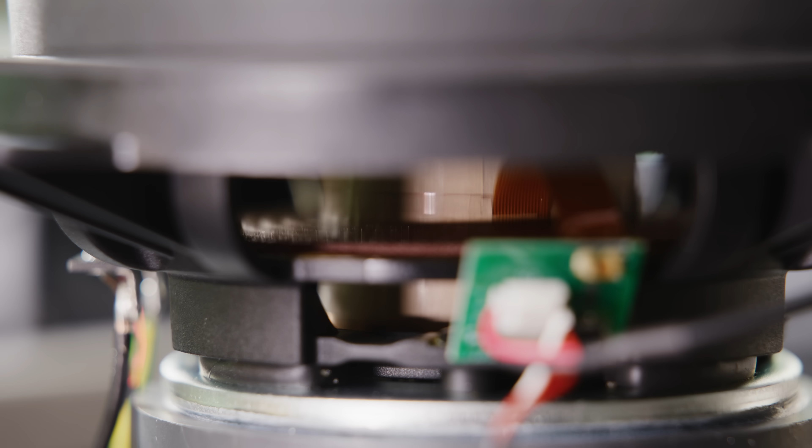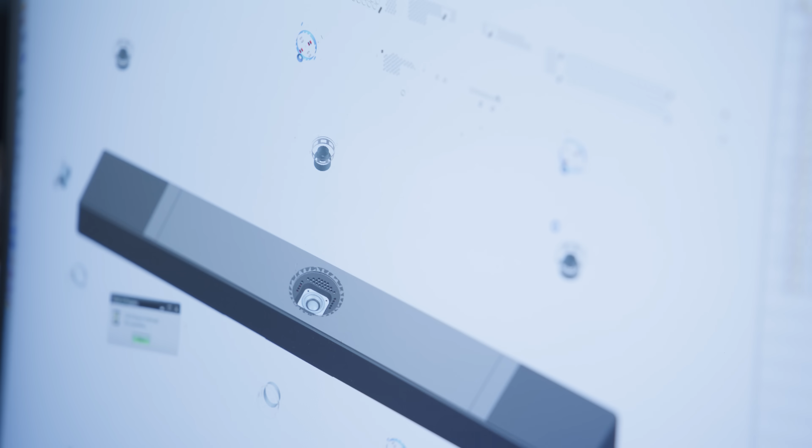We've developed a sensor called VECO, which goes inside a driver, and we can detect the coil velocity. And effectively, this is an electrodynamic sensor. Intuitively, it's very straightforward. So we know the signal that we're applying to the loudspeaker. We know the electromechanical properties of the loudspeaker. So in an ideal world, we should be able to fully predict the velocity of the driver based on that information alone. Of course, in the real world, that is not what happens.

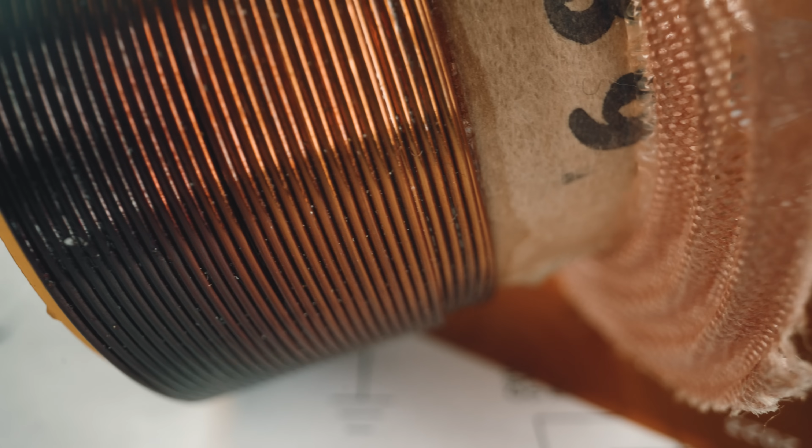Every loudspeaker is subject to some amount of distortion, which will mean that the velocity that the driver is actually exhibiting will be different to what we predict. That's where the VECO sensing coil comes in. It's inside the driver, it's underneath the primary coil, so it's moving as much and as quickly as the primary coil itself. So we have a way of sensing in real time how the driver's velocity is performing.

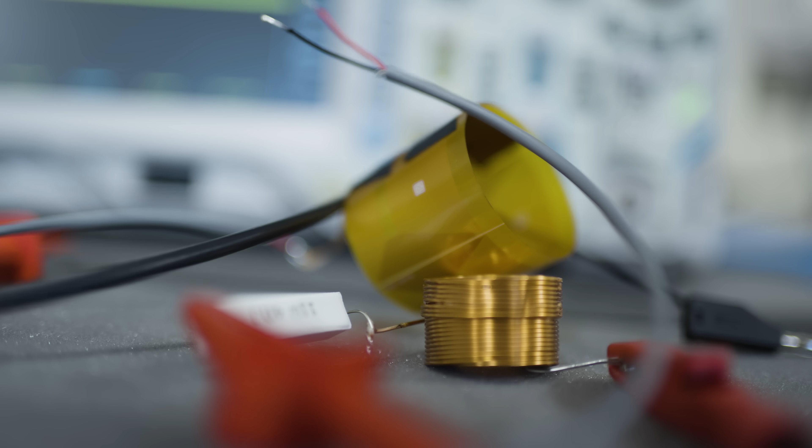Now, the real challenge behind this is that a loudspeaker motor is also electrodynamic. So when the loudspeaker is working and you're passing the signal from the amplifier into the voice coil, it's also generating a magnetic field. And in the past, some people have tried to add a secondary voice coil on top of the voice coil that they're driving the speaker with to pick up the velocity.

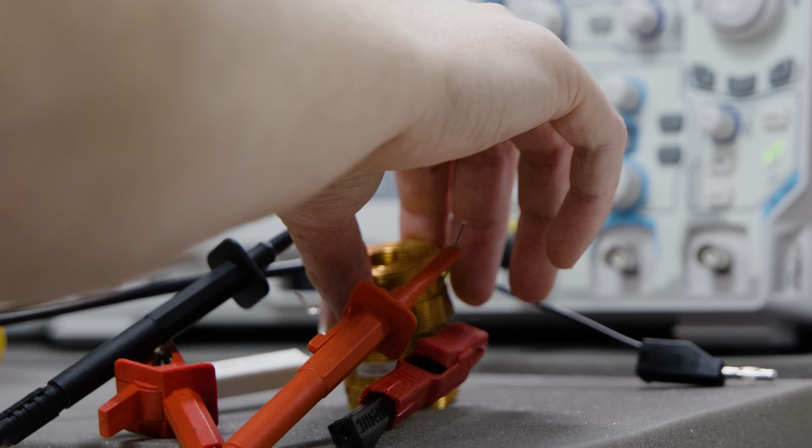But when you do that, you encounter quite a big problem, which is it starts to act like a transformer. So in addition to a velocity signal on your second coil, you're also seeing some coupling directly from the magnetic field generated by the voice coil to the secondary coil. So what we have is a sensing coil which is printed onto a flexible PCB, and this PCB is wrapped around into a cylinder and replaces the voice coil former.

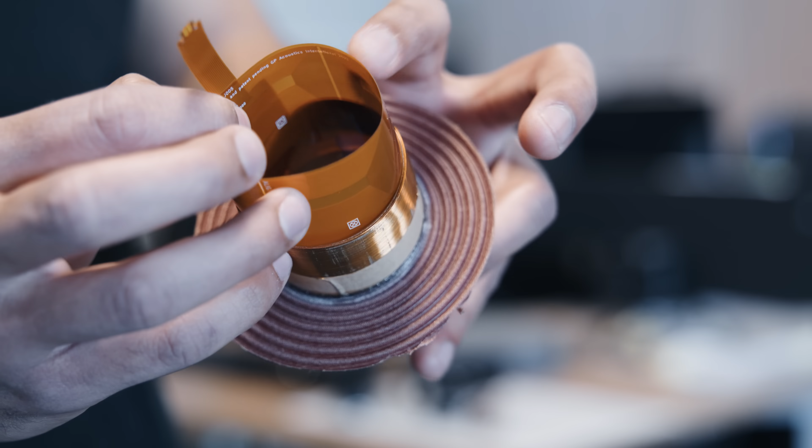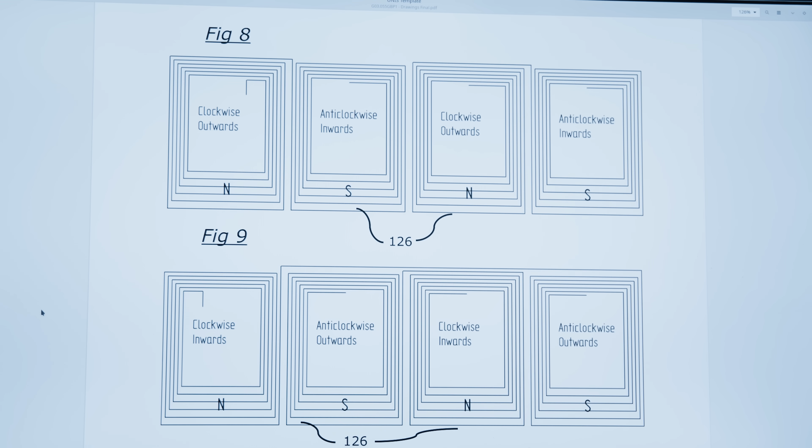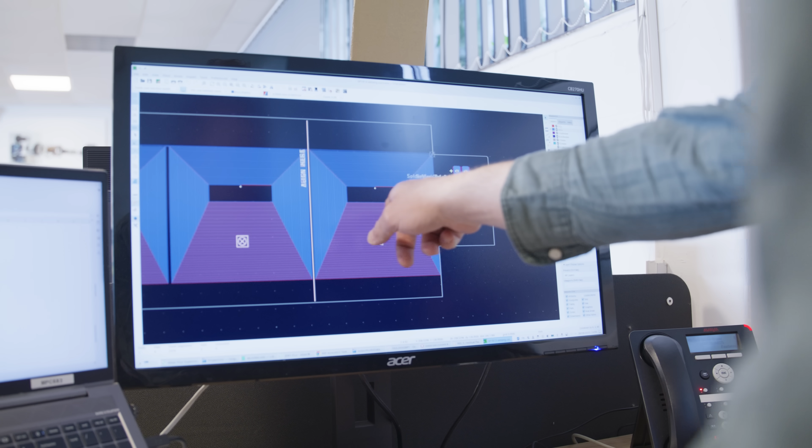Now, when you look at the sensing coil itself, so obviously it's wound in a coil, but if you imagine it laid flat, you will see that we have a repeating pattern of winding directions. So we have one that's wound clockwise, then anti-clockwise, then clockwise, then anti-clockwise again. When these are wrapped around and the voice coil is wound on top of them, they are orthogonal to the voice coil. And what that means is each of those 4 loops is at 90 degrees orientation to the voice coil. And this geometric orientation means that the AC magnetic field generated by the voice coil does not couple to the sensing coil.

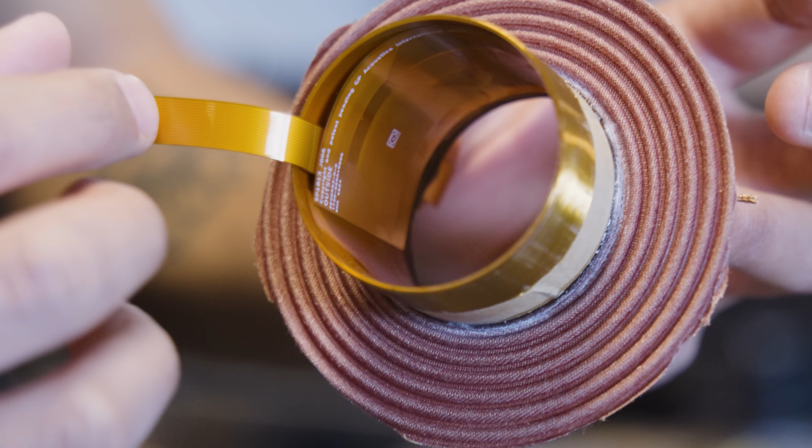Now, we need to provide a magnetic field that the sensing coil will couple to so that we can generate EMF in it and detect the velocity. So that means we need to create another magnetic field in addition to the magnetic field that will drive the voice coil. And this field needs to match the orientation of our 4 loops.

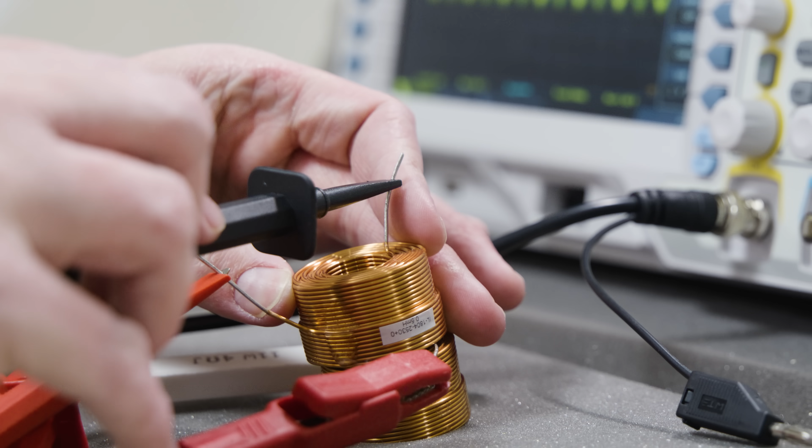Now, effectively, when we put these 2 motor systems together, the voice coil and the loudspeaker motor, the sensing coil and the sensing motor, these 2 motor systems are uncoupled. They cannot see each other and they can coexist independently. We can drive current into the voice coil and create force to push the diaphragm, and we can independently pick up the velocity on the sensing coil.

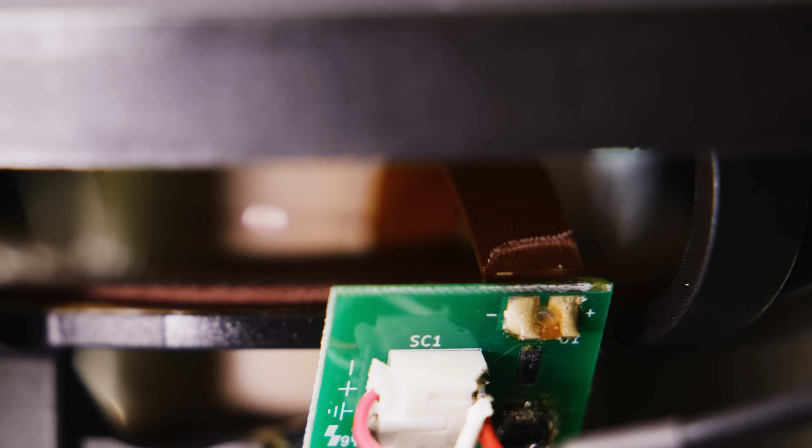When the loudspeakers are operating, the voice coil is fed with an electrical current which represents your music signal, and the loudspeaker motor creates a force which pushes the diaphragm. When the voice coil moves, the former goes with it and the printed PCB goes with it. And on the secondary coil, we get a change in flux due to the secondary motor system that generates an EMF. And that EMF is proportional to the velocity of the cone.

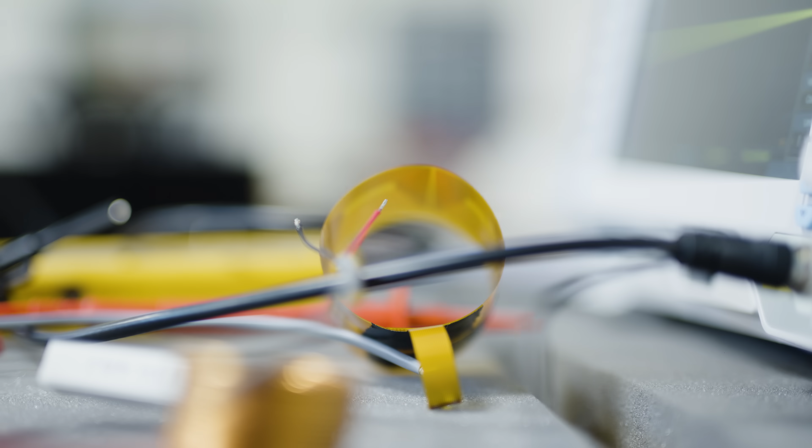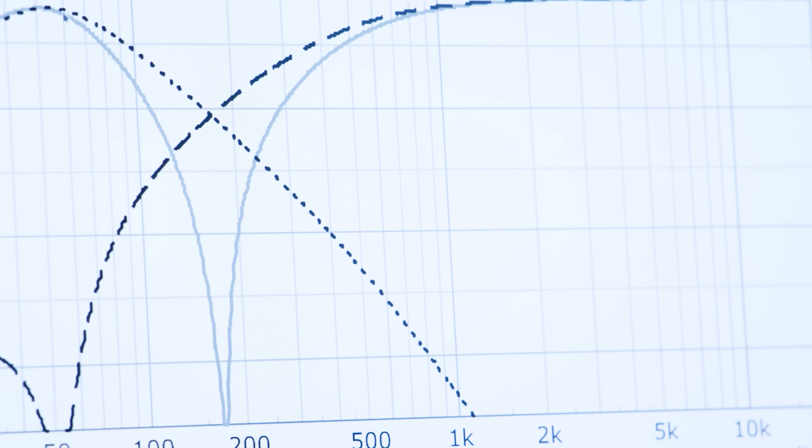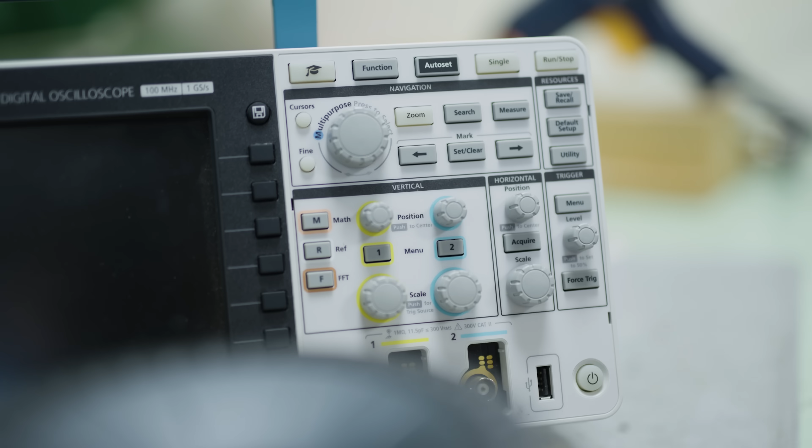And we can take that velocity and feed it back in a negative feedback loop, which means any error that appears on that velocity we can correct for in the loudspeaker electronics. And this means we can get much better control over the loudspeaker cone motion. We can effectively have a damping factor which is below 0, much more control than you can get with a normal voltage amplifier. The overall result is better controlled bass and lower distortion bass.

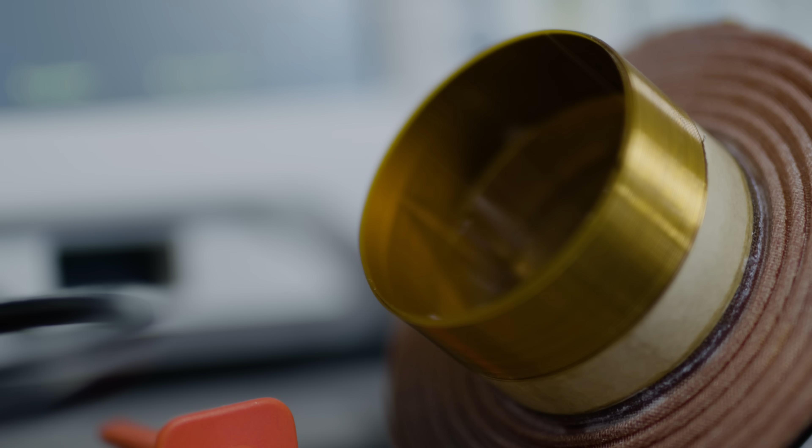And if we run that without the sensor attached, the cone motion is completely out of control. It's way too much. And one of the beauties is that we can control that by closing the feedback loop, and we can precisely define exactly how much we want to feedback and how much we want to control the motion. And that gives us the ability to regain really good tight bass, really good clean control of the low frequencies of the loudspeaker.

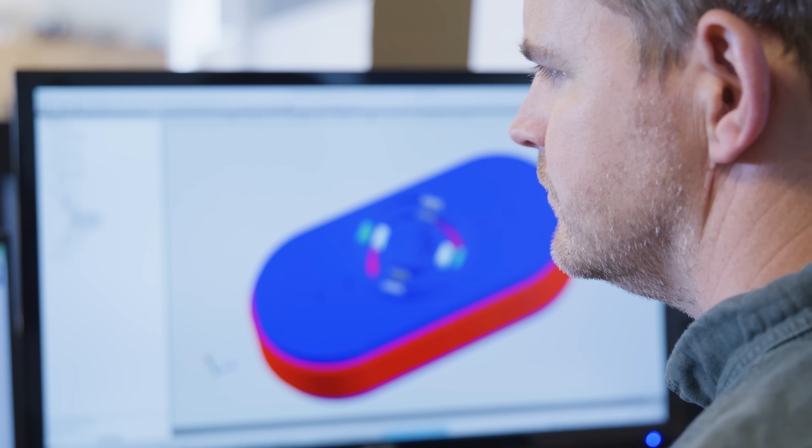Adding a sensor to our active systems has been on our radar for a long time, but actually developing the sensor has been a huge undertaking. Now we have it, we're starting to explore the possibilities of how we can use that signal and how we can best improve the performance of our products. Even on the first attempt, we're getting some really great results, and it'll be exciting to see how far we can take this in future.